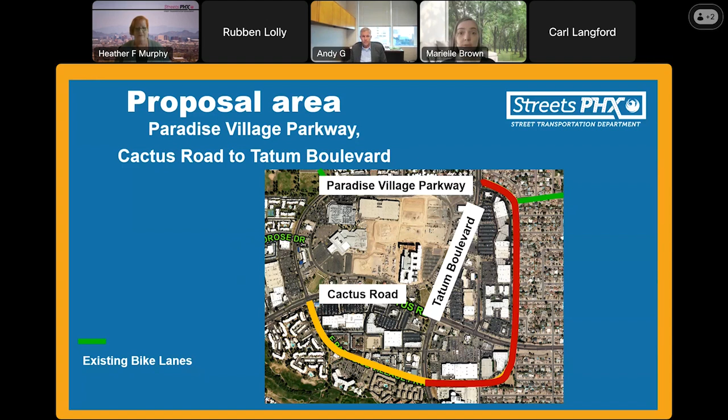But first, tonight we're here on June 17th to host this public meeting and to get your perspective on what works best for your community. We're also launching a survey tonight. It will be on the project website, the same one you used to sign up for the meeting. We launch it during the public meeting so there's a chance for people to really see what the project is about before they take the survey. So that will be going live tonight, and it will be open through July 6th. Please take the survey, and please encourage your neighbors to take the survey. We really want to hear from the community.

After we have gotten that feedback, that will help to inform the decision, and we'll share that with you in summer of 2025. And then, as Andy said, there is a planned pavement project, and we anticipate that planned pavement project will happen in fall of 2025. We will share the striping decision before that pavement project goes forward.

So this is part of our Complete Streets program. Since 2017, the City of Phoenix has had a Complete Streets policy that requires us to consider everyone using the street when we design them. So whether you're driving, walking, biking, or taking transit, we really strive to design our streets for everyone. The goal is to create a network of connected streets so that people have options and can choose how to get around in a safe and enjoyable way.

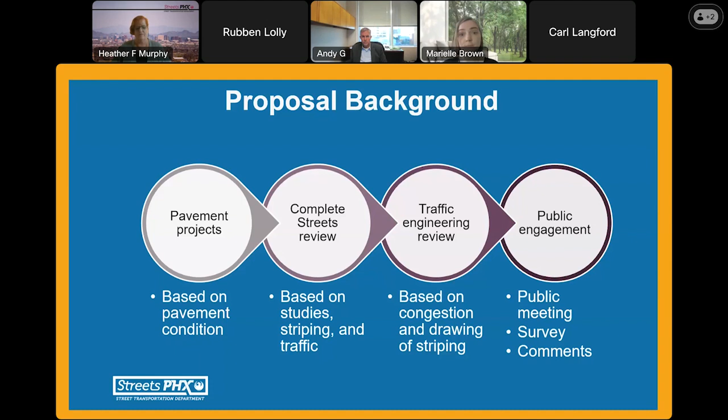So when we're thinking about bike infrastructure specifically, we always think about who's going to be most likely to use it. When we look at streets that don't have a bike lane, or maybe they only have a bike lane near very high-speed traffic, that's typically the most assertive bike riders who are comfortable using that. But then we have a larger group of the population who's more casual, the people who do bike but are more interested in bike lanes that are on slower streets, or maybe bike lanes that have buffers to separate them from the traffic. And when we think about protected bike lanes or separated paths, that's really anyone who's interested in riding a bike who might be interested in using that kind of facility. It's just something to think about when we show the options, who might be interested in using the street.

And so with that, I'll start sharing the options. We're going to talk about the southwest section first, that's the section from Cactus Road, the western intersection, to the southern intersection of Paradise Village Parkway and Tatum Boulevard, highlighted in yellow on that map. Right now, what's out there is one driving lane in each direction with a center turn lane, and there is some parking on the south side of the street.

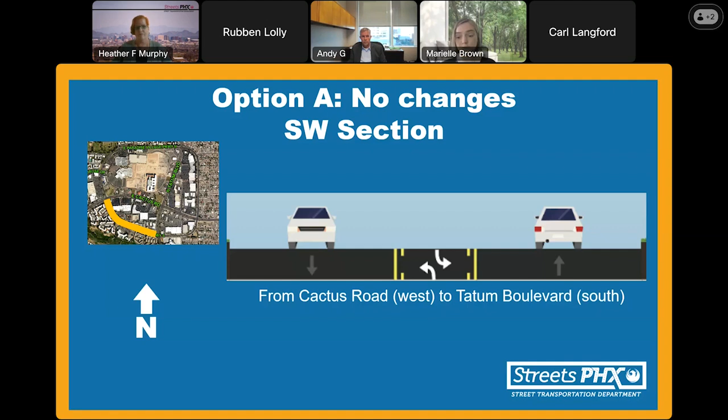So option A for this project is straightforward: we would be making no changes. This section does not have a pavement project planned, so it would literally be no changes to the street for option A. This shows what the existing intersections are for option A, which again is making no changes, maintaining the turn lanes.

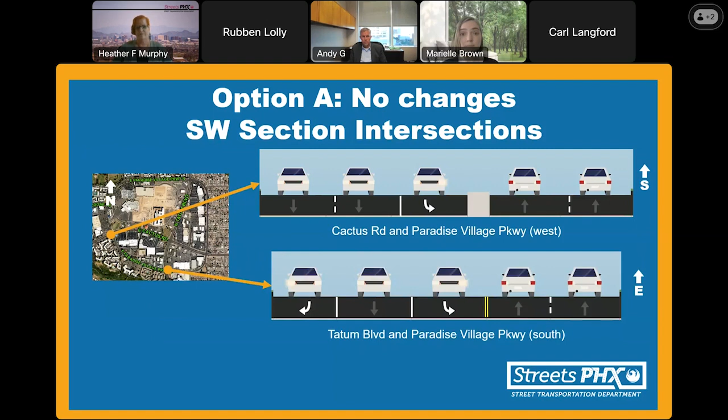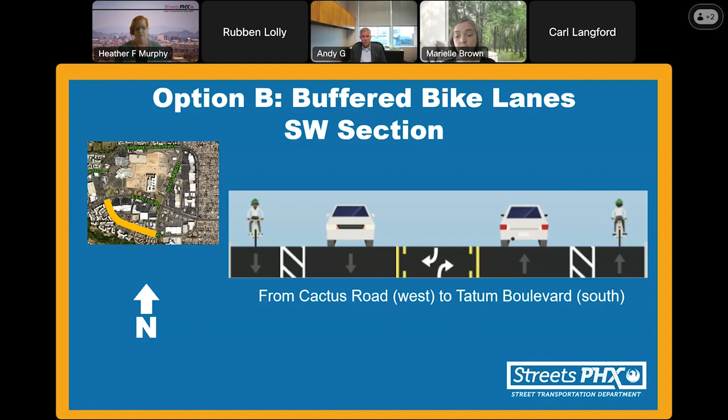Then option B for this section is adding buffered bike lanes. The existing driving lanes are pretty wide, and there is room to put in buffered bike lanes, but it would require removing that parking on the southern side of the street. This shows what the intersections would be for making those changes to add buffered bike lanes. I do want to note that we would still have room for the left turn lanes with the bike lanes going into the eastern section of Paradise Village Parkway. There would be one fewer traffic lane at the intersection, and that's really tied to option B for the eastern section of Paradise Village Parkway, which I'll get to in a minute.

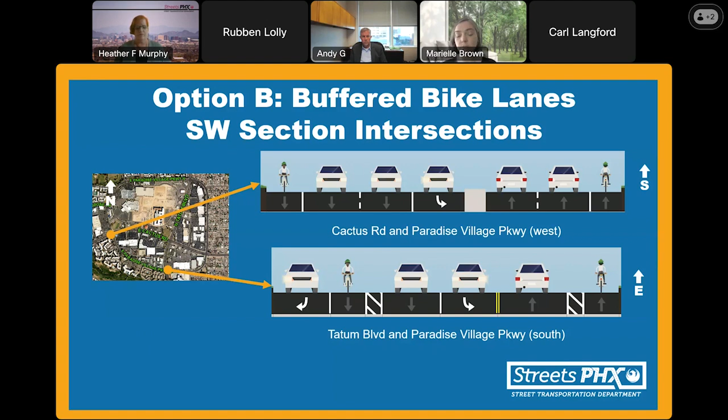When we look at these proposed changes, we wouldn't anticipate any congestion impacts because we're not changing the number of traffic lanes. We're still going to have the same number of lanes and the same number of turn lanes at the intersections. However, it will have some parking impacts, with reduced parking on the south side of the street.

One of the advantages of narrowing driving lanes visually by adding bike lanes is that it can reduce speeding for cars that are going over the speed limit.

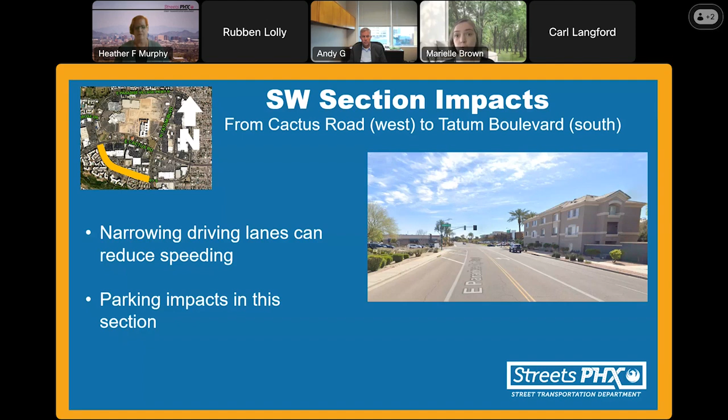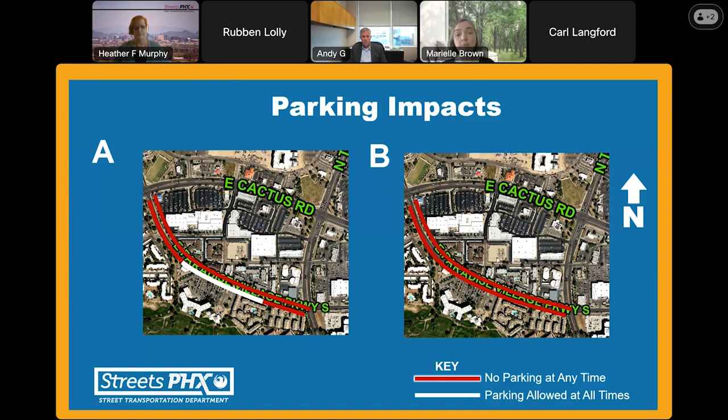We did conduct an observation of the existing parking. We had staff go out and observe the existing parking usage on Paradise Village Parkway. Looking at 3 separate times throughout the day — morning, around lunchtime, and evening — we found that there were 3 to 5 passenger cars using those on-street spaces. Of course, this is just one quick point in time, and that's why we do community outreach, so we can hear from you, because you see the street much more than we can.

Here's a quick summary of the proposed changes. Option A is what's existing, that 1 lane in each direction with a center turn lane. Option B is the same layout, but with buffered bike lanes and some parking removed.

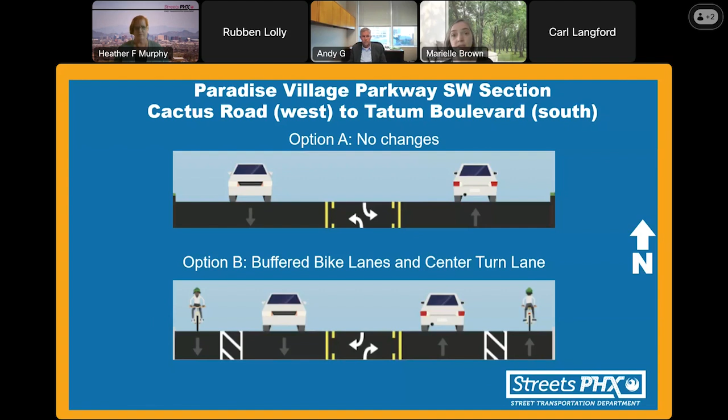That takes us to the eastern section. We have option A again for the eastern section — this is from Tatum Boulevard to Tatum Boulevard, so the south intersection of Tatum to the north intersection of Tatum. Right now it's 2 lanes in each direction, and option A would be to repaint the street as it is. There will be a pavement project, and then the crews would come back and paint what you see there right now.

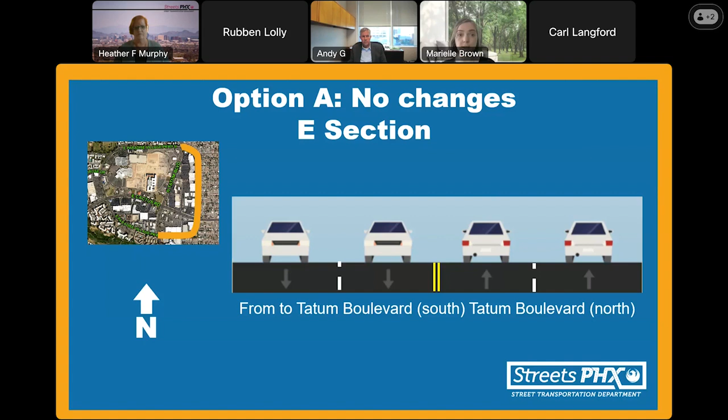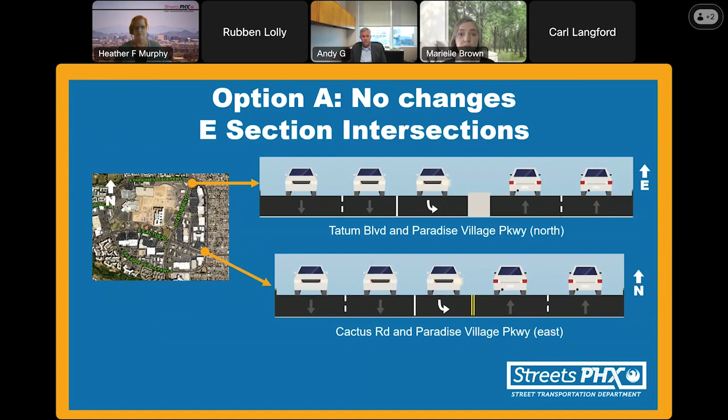This shows the intersections that would be staying the same for option A. We have left turn lanes, and then we have 2 lanes in each direction at the intersections.

Option B would be to update the street to add a center turn lane. We would have 1 lane in each direction and then buffered bike lanes. For this option, there would be space created for left turners, and it would also be creating space for people who are interested in bicycling.

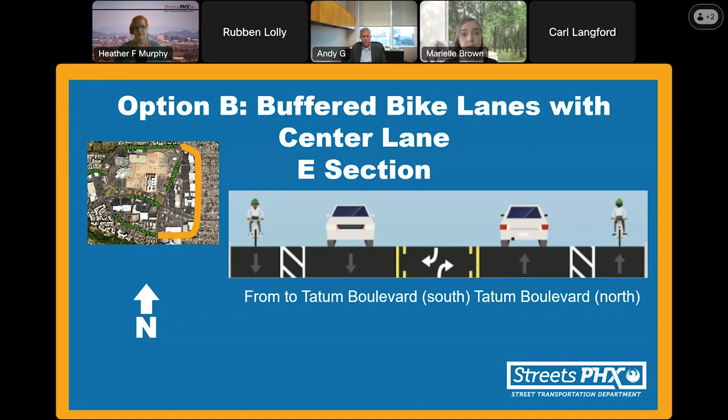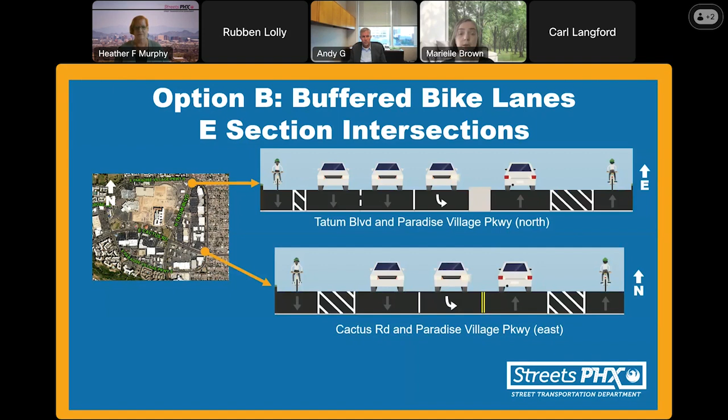The intersections would be impacted because, as you can see at the Cactus Road and Paradise Village Parkway East intersection, we would be able to maintain that left turn lane, but because there are fewer lanes in the section of street, there would be bike lanes in place of the outer lanes at the intersection.

With that, I am going to turn it over to my colleague Carl Langford to talk about the congestion impacts and just the traffic impacts of making this change.

Thank you, Marielle. So what we want to talk about now is really, as we potentially make these changes, people always ask, well, what does that do to traffic? How does that affect things? Top line, it will potentially narrow up some of the lanes a little bit. That helps people overall reduce speed generally and drive a little bit closer to the speed limit. The other main thing this does is the center lane provides a dedicated left turn space — it'll be a two-way left turn lane. So in areas where there are driveways and side streets, when you're making a left turn, rather than making that turn from a travel lane where somebody behind you has to go around or slow down and stop for you, you shift over into that two-way left turn lane. Statistically, they're a much safer overall design, having a 3-lane segment with 1 lane as a two-way center turn lane in the roadway.

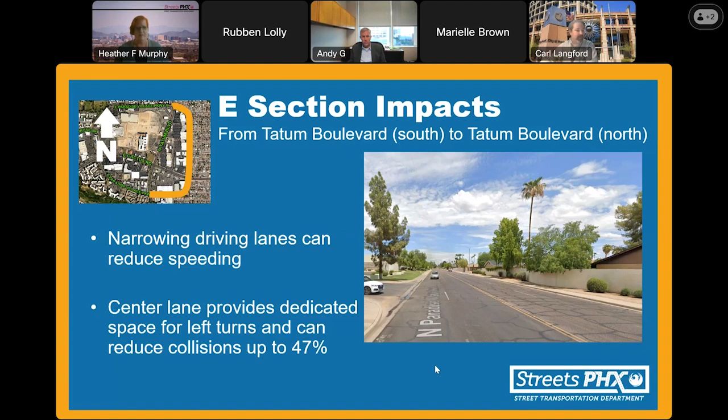So the other item we always get asked is, okay, what does this do? You're taking 2 lanes in both directions and changing it down to 1. And so what we do is we look at traffic models.

Traffic modeling, and really throughout the city on our city roads, traffic is impacted most by the traffic signals and how they operate. All the traffic signals coordinate traffic and give direction so that certain people can go at certain times and others go at other times, to reduce conflict. Anytime you have a traffic signal, you're introducing general delay to the area.

So what we did is we went out and counted the traffic, counted all the turn movements at the signals. There are 3 different signals affected along this segment: Tatum and Paradise Village Parkway, and the Paradise Village Parkway and Cactus intersection further to the east. It's a big loop, so there's also one to the west, but there are no changes there, so it doesn't affect that one.

Really what we're looking at is the change from Option A, which is existing, to Option B, where we reduce the lanes from 2 lanes in both directions to a single lane in both directions. With that change, we see very little to hardly any delay at all in the intersections overall. In fact, one intersection gets better, one stays exactly the same, and the other in the PM adds 2 seconds. So overall it's negligible, as we'd say in the traffic realm, as far as impact to drivers. A lot of that is because the traffic in general for this road is relatively low, so it doesn't need the 2 lanes in both directions.

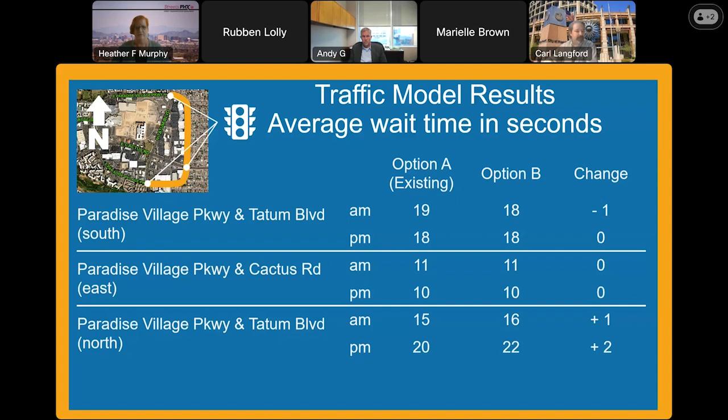You can go to the next slide. To summarize this southwest section for Paradise Village Parkway, from Tatum to the traffic signal at Tatum, north and south: Option A basically says we'll come back after the pavement and paint the road exactly as it is today, with no changes. Option B is to take the 2 lanes, one northbound and one southbound, convert those to a single lane, and add in a 2-way left turn lane. That would be the changes for this section of the project.

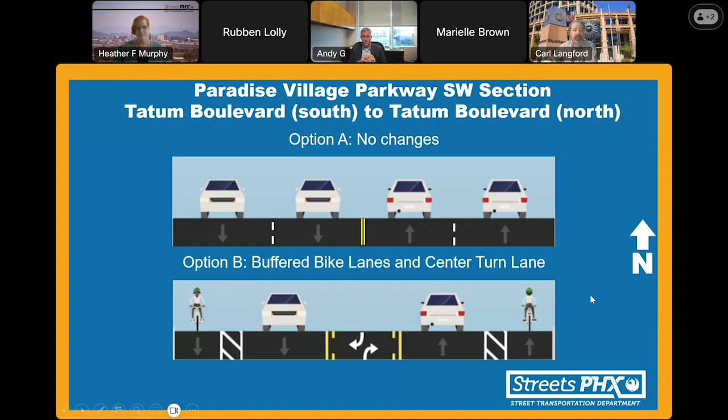So with that, we'd like to turn it back to Heather to go over the ending of the presentation.